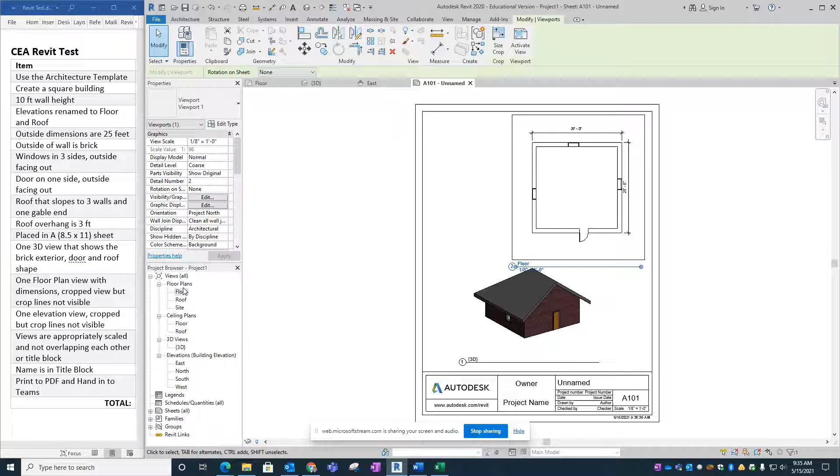So when we left off, we set up the floor plan to be put into the drawing. We're going to grab the floor plan right now and drag it into the drawing. When I drag it in, I can see that it's probably taking up a little bit more space than I want, so I'm going to play around with the scale on the floor plan. I go into the floor plan and see that right now it is 1/8 of an inch.

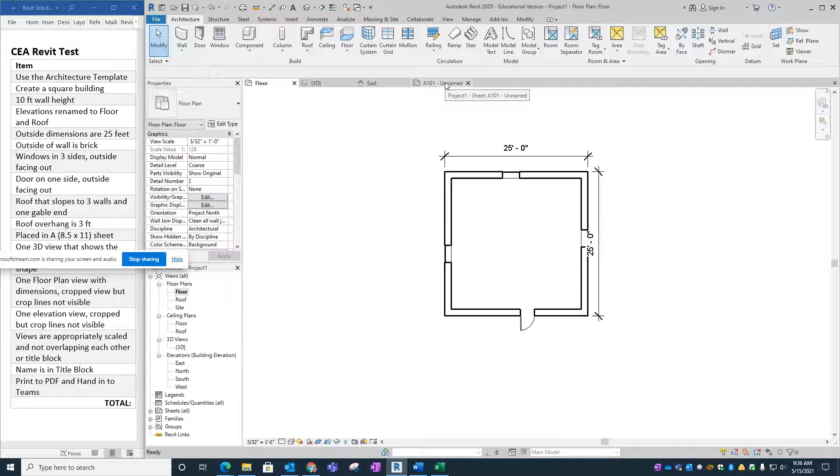And so I go up here, and to make it smaller, I go down. Let's make it the next common scale, 3/32. Then we can go into the drawing and see what that looks like. That's looking a little better, but the line on the bottom there is now a little big. So I'm going to delete that, drag it back in, and allow Revit to resize the line at the bottom for me, so it looks much better.

The last thing that I need to put in, I don't know why this thing is always in the way there, let's hide it. Oh, there we go. So the last thing I need to put in is one elevation view, cropped, but crop lines not visible. So I go over to my elevation views, and I believe that south is the front view. Let's set it up first before we drag it in.

So I go look at my south view, and it actually doesn't look too bad. Maybe these lines are a little big. Let's look at where my crop line is. Let's unhide the crop line.

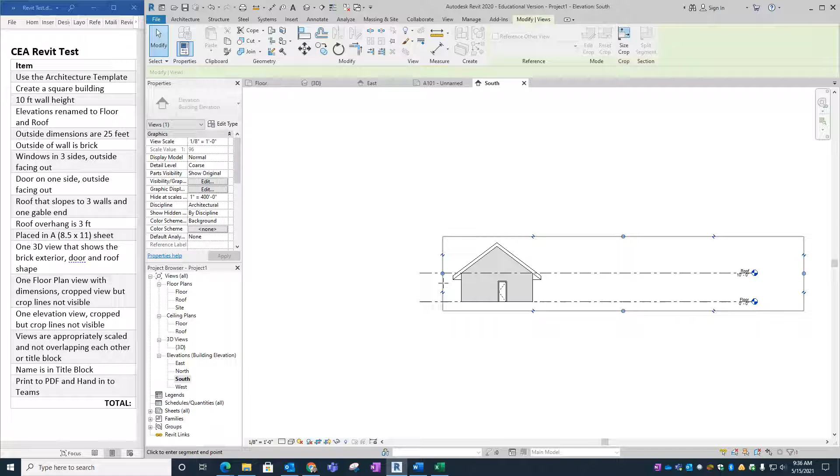Again, grab those toggles and drag them in nice and tight, and notice how the levels, the roof and floor level lines, tighten up as I drag in those. And you may want to also change what it looks like, because it's going on your drawing, so let's make it look pretty. You can do consistent colors, or you can even go with realistic.

There we go, that looks wonderful. Before we go in and put it in the drawing, let's turn off the crop line so it looks a little more professional. We go back into the drawing here and grab the south view, and we can drag that in, and it is a little big there.

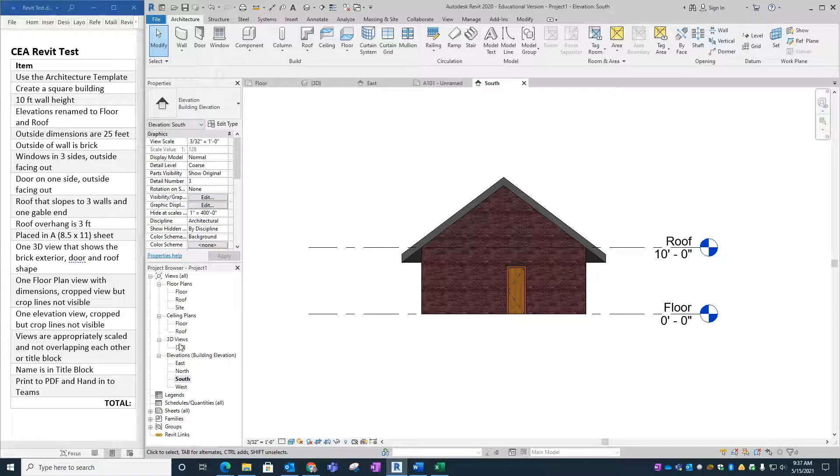So we're seeing that it's 1/8. I'm going to go back into the south view, and let's make that one a little smaller as well. Let's see, where are we with that? Right now it's 1/8, let's go down to 3/32. And now when we go into our drawing, it's looking better.

I think I need to tighten that a little bit more, actually. It's not quite where I want it to be yet. So I'm going to go back into the south view. I'll turn on my ability to see the crop lines.

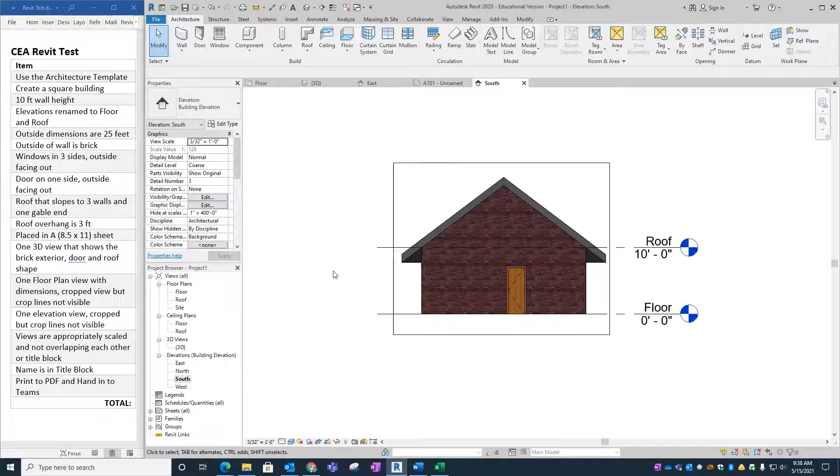Let's crop that a little tighter, and crop this one a little tighter, and see if we can get these guys to come in a little too. There we go, that should hopefully clean it up a bit. Turn off the little ability to see those.

Go back into our sheet and delete this one, and let's pull in the cleaned up south and see if that fits. All right, it's not ideal, things are still a little bigger than I'd want them to be. So some of your points are for having things not too big.

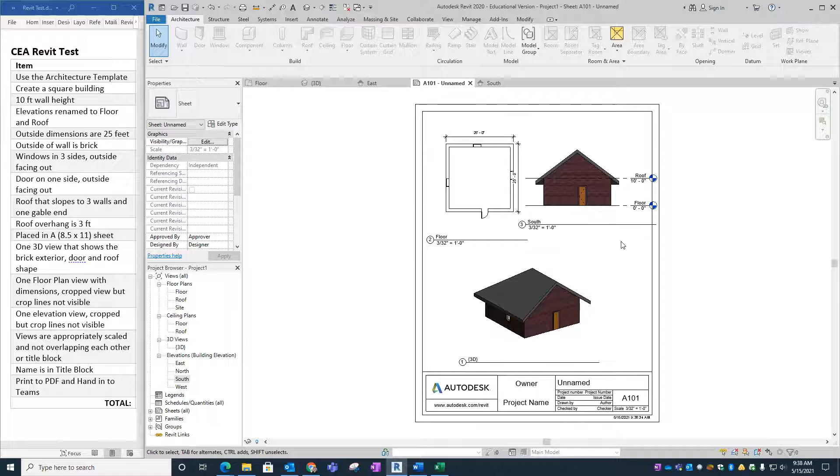So if this was your test, I would recommend that you play with it a little bit more, but I think you get the idea at this point of how you can resize these things to make them fit properly into this drawing size. You should scale those down a little bit more, but I think the explanation has been done at this point.

I don't like those levels intersecting with the title block or with the border of the drawing. Views are appropriately scaled, so if I would end this right now, I'd lose a point or two for this last little piece here. The views are not appropriately scaled.

Name is in title block. This is actually super easy to do. Just click either here or click here and get your name in there. I'll just put S. Oosterhuis.

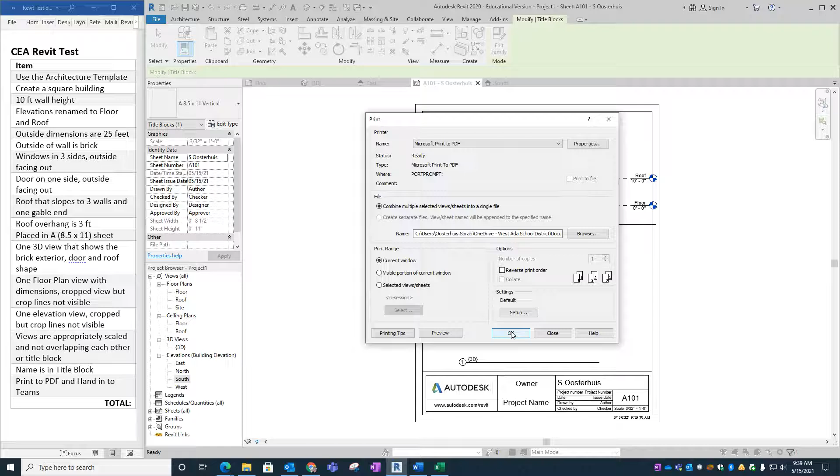And then you're going to print it to PDF and hand it in. So you'll just go over to File, go down to Print, and then when you choose your printer, you're just going to choose Print to PDF. Accept all these defaults, assuming that you're on the drawing page. It'll print that drawing, hit OK.

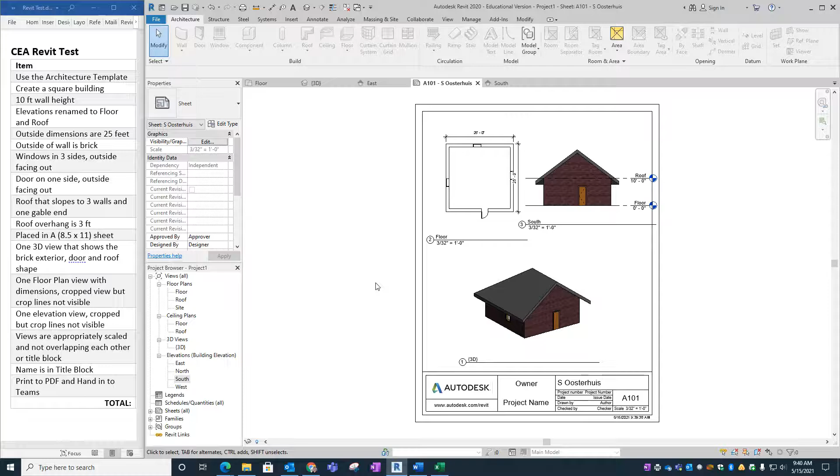Pay attention to where you're printing it so that you can find it back when you're ready to hand it in. And name it Oosterhuis Test would work. We put Revit in there and hit Save, because when you hand it into Teams, it'll be obvious whose it is, because it'll hand into your little part of Teams. Then go ahead and hand it in, and that is all you need to do.